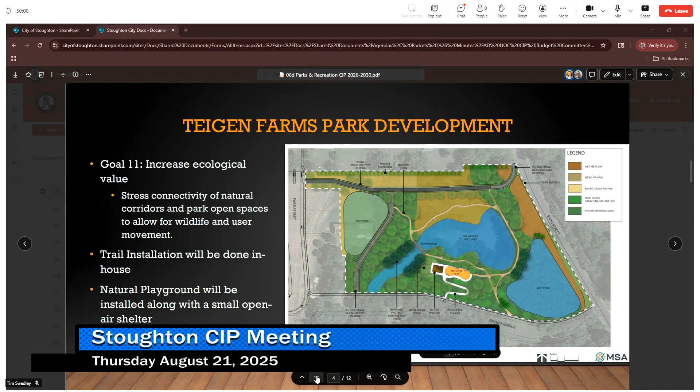And then the total down there, we currently have budgeted 200,000 for next year. That's all dependent on what we're bringing in for park development fund fees, though. Same with all of our parks - as we bring in those impact fees, if we have the dollars, we can do the whole project outright, but if not, we'll phase in the project itself.

And if anyone has any questions during this, feel free to jump in. But otherwise, next slide, please.

Now, moving on from those park development funds, this is kind of miscellaneous items. Actually, when Jim mentioned they're reaching that CIP threshold, I don't know what that number is, so some of this may actually be operating. I'll let you inform me, but some of the miscellaneous items we had for this year - I don't have my glasses - but soccer goals out at Virgin Lake Park.

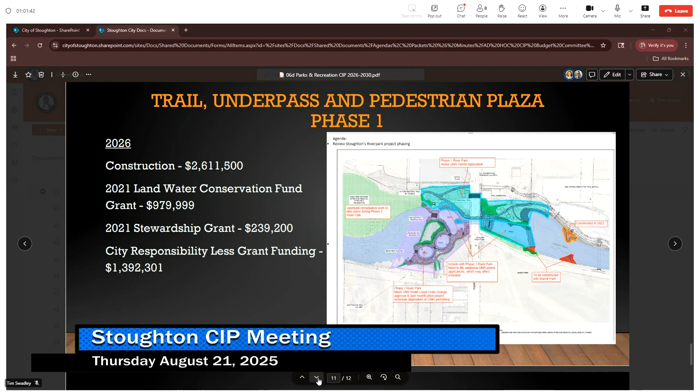And Tony, this will also fill in the head race and tail race. Correct, yeah. So this will fill in that head race, tail race, which gives us the opportunity to move forward with the powerhouse and whatever we want to do with that, and then allow that RDA project to begin and get developed.

Any questions? Question, going back to the bridge, you mentioned a tap grant. Yes. Do you know about when we would know? End of October, I believe they have to make their determination by the end of the year. So by the end of the year, then we'd have time to adjust budget if needed at that point. Any other questions for Tony?

I had one. Tony, when you talked about the DNR getting all the permits in and the clock is now set, how much time do they have to make a decision on what was lastly submitted to them? That's a good question, and it already came up today, and I do not have the answer yet. It's either 6 months or a year. I'm not sure which one.

But I will say that the DNR has already reviewed our remediation plan, and we've already turned in the floodplain analysis - the original floodplain analysis. They asked for some additional work on that, but we determined what we had turned in was sufficient. So we're turning that in with our permit, and they've informed us that because we already turned in some prior remediation documents, they have kind of a jump start on it, and they think they'll have a quick turnaround time. We've heard that before, Regina, I know, but I feel confident this time it'll be a little sooner than later.

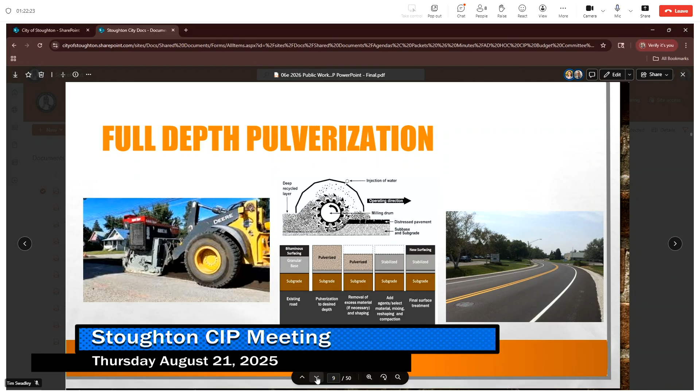Road reconstructions are basically a full reconstruction of all the infrastructure, or most of it, within the right-of-way. That's new sidewalks, new curb and gutter, new roadway, and most of the time new base material. We also take advantage of that opportunity to work with utilities and do all new water, sewer, and storm sewer.

So we have a couple of those projects going on right now with the DOT on East Main. Going into 2026, we have quite a few that are joint projects that are full reconstruction.

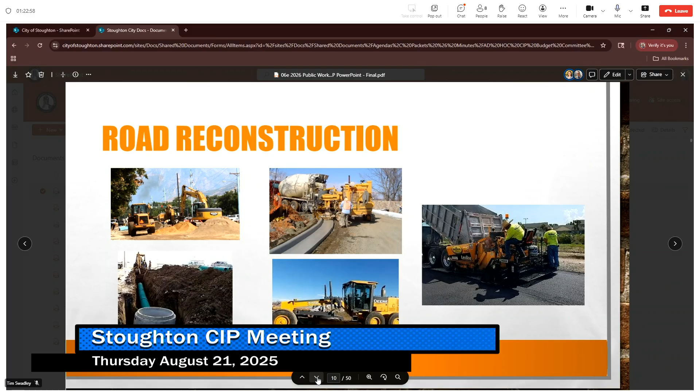Next slide. Stepping through these projects, Van Buren Street. This is a continuation of the current project we're doing on Van Buren. Right now we're doing from Roby to Creedeman. Next year is basically phase 2, going from Creedeman to Gregg Trail.

This is actually putting the road on a road diet, using less asphalt, more pervious landscape, larger terraces, more opportunity for trees. Right now the roadway is just way too wide, so we're taking this opportunity to shrink it down and make it a more appropriate width, which still allows for parking on both sides but doesn't need to be that wide. It allows for larger terraces, more trees, less asphalt, less oils, that type of thing. It's coming together really nicely on this section of Van Buren, and we're looking to continue that next year to finish it off.

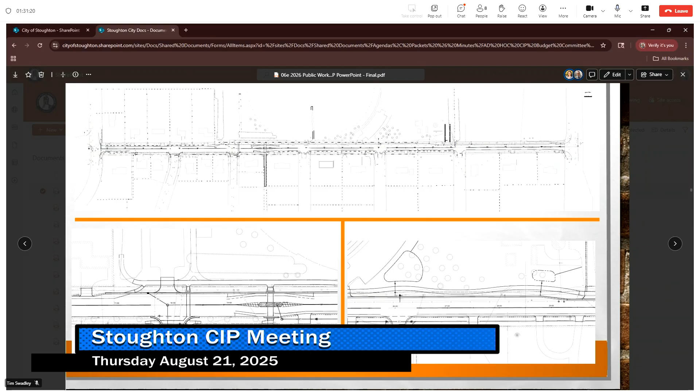It came to our attention that Racetrack Road may not be the most appropriate name for a roadway. I never thought about it, to be honest. I have to agree, it's maybe something to consider. Obviously changing a road name isn't as easy as one would think, but it's something to look at. It was actually a Dunkirk resident who came up with it. So we'll see, that's something to consider.

Any questions on that project? It's a pretty hefty one.

Part of the conversation too is that we have large events down there, so I briefly mentioned it to the chamber. That's a conversation you'd want to have. Sure, but I know Tony has a lot of activities there too, and there's not a lot of access points to get to the park.

If approved, during construction we've already talked about how we're going to phase it and get access in. Talking with Tony—when do we start, after softball, after baseball? It's different after soccer, of course, you can't forget about soccer, so we'll definitely take care of them first. But the biggest thing is making sure we take care of our stakeholders while also getting a good product done as efficiently as possible.

East McKinley Street, this is another kind of holdover, if you will—between Prospect and Grant. Prospect and Grant were done, I think, in 2022 or 23, somewhere in there. In hindsight, this section should have been done with it, so we're taking the opportunity now to reconstruct this short section of street along with Stoughton Utilities.

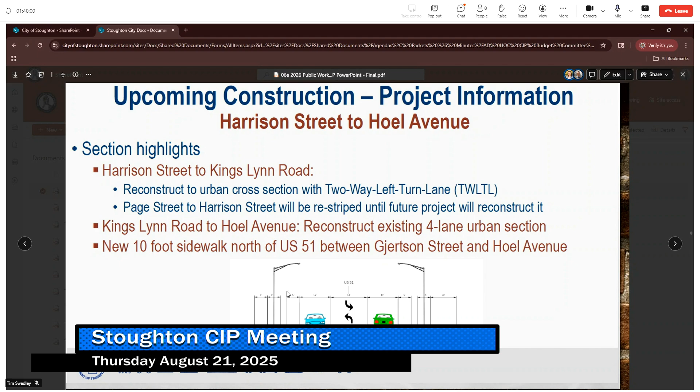Next slide, Jackson to B. So basically Hults Road—actually I think that's the next slide, I'll hold off on that one. This section will go from a 2-lane to a 4-lane section that'll be reconstructed, with all new lighting. Like I said before, we'll also do a 10-foot multi-use path on both sides of the roadway, and enhanced stormwater—there'll be a couple of stormwater basins throughout this corridor for us to take care of.

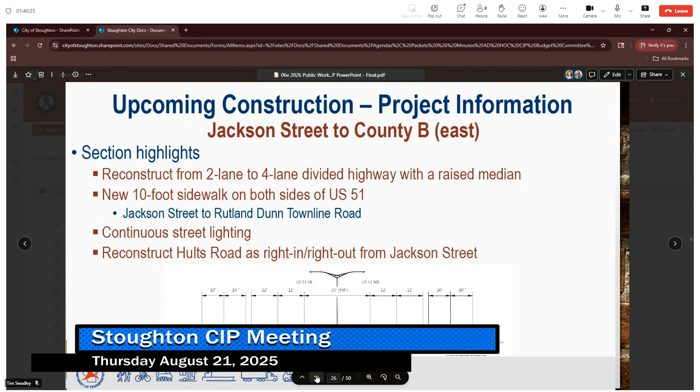That's the way it goes. Oh yeah, go ahead—that one, so that's the Hults Road intersection.

So those of you that have gone to Walmart, kind of by our Aldi's in that area, that is very confusing, and it can be done better. So we're going to take this opportunity to improve that intersection.

Basically, there's going to be a median put in on the west side of 51 on Jackson. There'll be a right in, right out at Hults Road going into the car dealerships. We did have conversations with them early on about this possibility, and believe it or not, they were all for it as long as truck traffic can make that turn. So that'll be happening, and the lighting will be enhanced, and we'll be taking that lighting on from a maintenance standpoint through an agreement with the DOT.

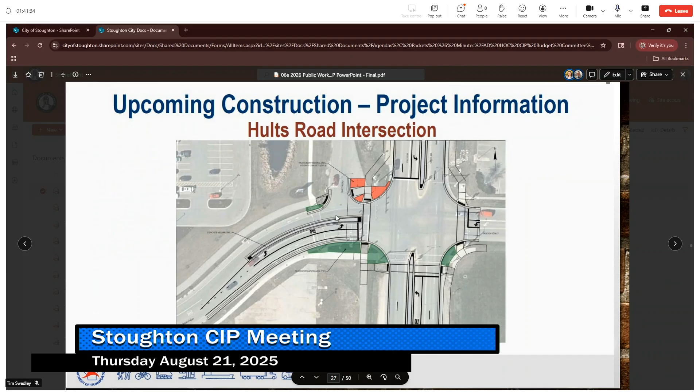So this is just showing the roundabouts that we discussed - obviously the one at Rutland Dunn Town Line and then one at B. Speed limits will be reduced as well.

I'm not sure if I touched on that - I think it's at 35 miles an hour, and that's up to B. So if we ever get a connecting highway to B, basically we can be under local control and we can dictate the speed limit, so we could bump it down if we wanted to. At Roby, essentially we have control and we could bump it down to 25 or keep it at 35. We have that latitude.

Any questions on the DOT project? There's going to be a lot more coming for this and a lot more meetings with the DOT, but rest assured we are doing everything we can to work with our partners in the business community and our residents along the corridor. The DOT is constantly sending stuff out. There's been meetings for the last 15 years on this project, and it's really been enhanced the last couple of years. If you haven't gone to the public informational meetings, I think those are really good.

There's one coming up - for phase 3 this year, from Church Street to 5th Street, there's a public information meeting on September 8th from 5 to 7. That's at the Senior Center Annex, so that'll be Monday the 8th. Everybody on the corridor, anybody within the project, gets a mailed letter to come talk about the project, so they know what's happening and can get contact information.

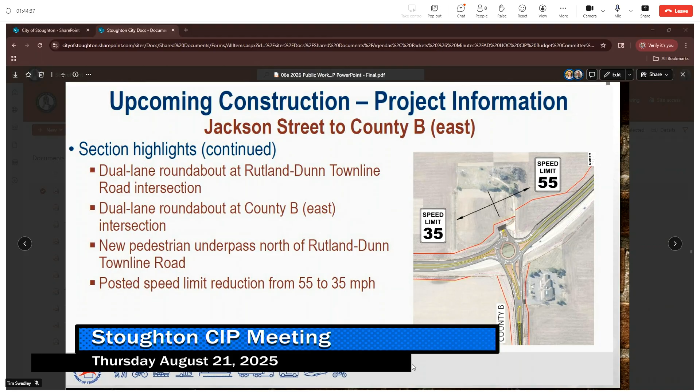All right, the asphalt overlay - oh, sorry, before you move on, I just want to point out in the CIP list in front of you, Van Buren is in 2027 on the list. So including that in 2026 would increase where we're at from 15.3 million to 15.9.

Yeah, I guess you tell me. Yeah, right, that's right. Yeah, no matter if it's 26 or 27, it needs to get done. So wherever it fits, obviously we can discuss all that.

All right, so our asphalt overlay program - I mentioned that earlier, and right now this is just to showcase what we're doing with these dollars. So basically we're doing this kind of on our own with our pulverizer machine. Taking advantage of that, we're able to do Christianson Way and Mellum this year, and then next year we do have a couple different roads that we're eyeing to do.

I'm not trying to be secretive, but they'll be coming to Public Works to really discuss where the priorities are. These are roads that do not have a utility component, roads that don't have a lot of curb and gutter issues, so not a lot of concrete issues - roads that we can just go in there and basically grind, shape, and do undercutting in-house, then have a contractor come in and do the asphalt. So these are pretty much those down and dirty roadways just to get a new surface on them, but don't have a lot of concrete or underground components to them.

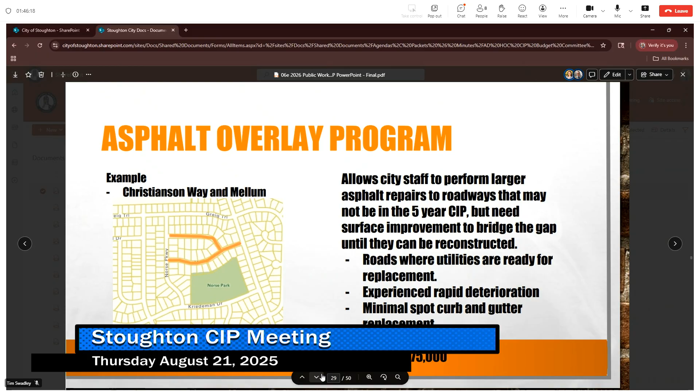So here's just a showcase of what we're looking at. The curb and gutter is in good shape, but the asphalt is alligatoring. We got a little bit of rutting going on, but those are things that we can correct in-house.

Sidewalk replacement program, we got a good start on it this year, and we really need to keep up on this, or else we're going to fall farther and farther behind. We're looking at devoting $150,000 to our sidewalk program.

This year, we took care of any legacy sidewalk issues that we knew about. Basically, if somebody were to call in and tell us there's a sidewalk issue, we would do a temporary patch. Some of these happened years ago, and we decided we needed to do something permanent to take care of them. Also, the longer we let this go, the more liability we potentially have as a city. So this year, we took care of that entire list, got rid of it all, and it was sporadic through the whole city.

Now we have a good base, essentially. We're going to do it systematically, and we have the city broke up into 6 different areas. We're going to go through systematically and get one area done at a time, and we'll stay in that area as long as it takes to get it done, because $150,000 may seem like a lot, but it goes very quickly. It just depends on the need of that area.

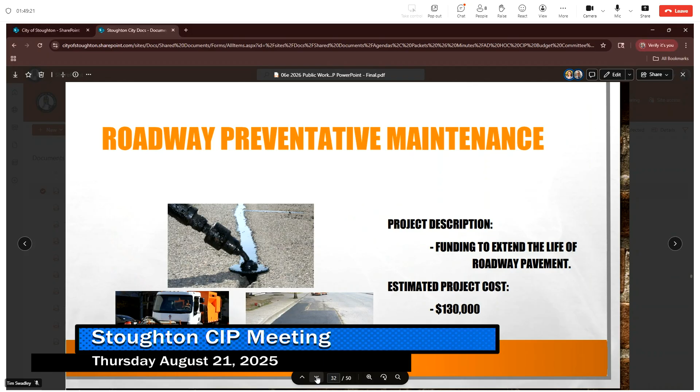Equipment replacement. We have a scoring mechanism that we use through our RTA program. Every piece of equipment that we have is in the program. We keep track of all the maintenance done to it, its useful life, and if it's been a problematic piece of equipment, how it's used—all data that we keep in our program. Essentially we can take that, and it quantifies into a number that we can use as a tool.

Because we also talk about the equipment—is it the right piece of equipment, or do we need to go in a different direction? So this is just a tool that we use to identify the trucks or pieces of equipment that have to be replaced. We have about 180 plus pieces of equipment that rolls through our shop. We take care of not only our own equipment, but also Stoughton Utilities, police, fire, EMS, and general services.

We're looking at replacing patrol truck number 14. This is a 2012 International, and right now it's in our 15-year life cycle.

Our new trucks are on a 20-year life cycle, so we're putting more stainless steel, not only in the bed like this has, but also in the chassis. All of our braided lines are stainless steel. Our tanks that house some of our equipment are plastics versus some metals. So we're looking at building new trucks that last a lot longer. Yes, there's some more upfront capital, but we're going to get 5, 6 more years out of them.

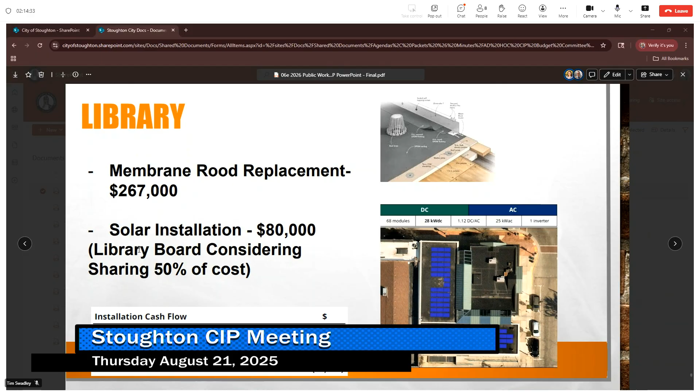The roof at the senior center is looking good. If you didn't know it was metal, and the annex is done, you probably couldn't tell it was metal. So the annex portion is complete. For the main roof structure, they're waiting for the brackets to come in for the solar panels - those are on back order. They should be in hopefully this week, and they can start again. But it looks really good.

With the library roof currently - the old section and new section - are those uniform or different types? I think they're different vintages, but I believe they're the same kind of membrane style roof. I don't know if it's a different brand or something, but there are two separate ones. Forgive me, I don't know the year they were put on, but that'd be good to know - they're obviously at the end of their useful life and we have some leaks.

The other thing we want to do, if we can, is calculate what our utility savings are going to be when we get to the operations portion of the budget, because that might free up money for other things - the fire station is one of them this year. You need a season or two under your belt to really quantify that, but based on their calculations, if it's a 60% or 70% reduction in electrical use, we can look to do that on the operating side. Also cognizant that you look at about a 3%, 2.8% roughly, increase in electrical costs every year, so there's that to take into account too.